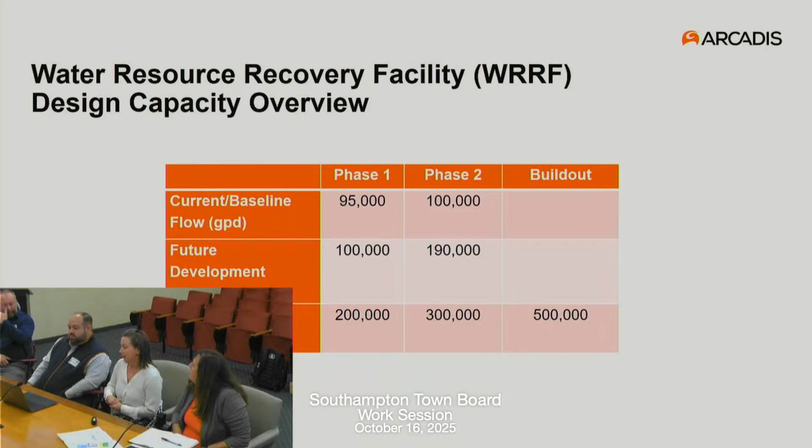And we added on top of that for phase one an allocation for the future development that is being worked through with Historical Concepts that Janice mentioned. So we have about double the current usage as an allocation for future development, bringing the phase one capacity to 200,000 gallons per day. And then in phase two, similarly, the identification of current usage based on water use, an addition for future allocation for development, and then a total. So this is just to give you some context on what we're looking at for the capacity of the facility.

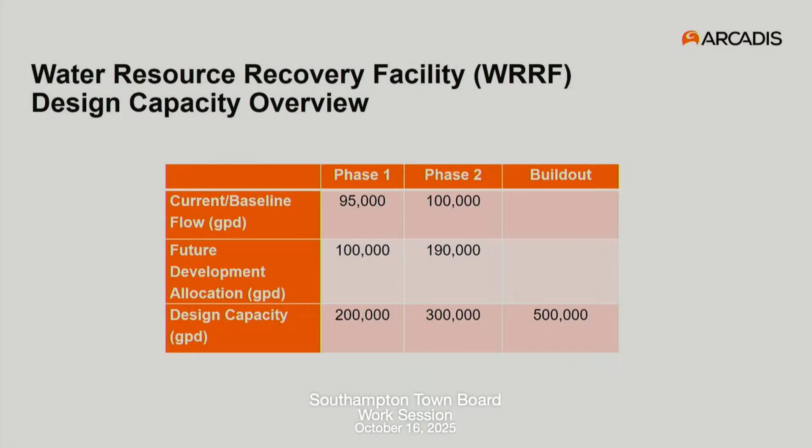And then in terms of site layout, what we're looking at here on the right-hand side is the loop of Enterprise Zone Drive that swings around. Our facility is the light gray rectangular box that has a darker gray access road around it. So that's the WRRF facility. What's highlighted in color here are the leaching galleys. All of the treated effluent from the new facility will be discharged back into the ground through leaching galleys. The blue area at the north side is a reserved area in accordance with standards.

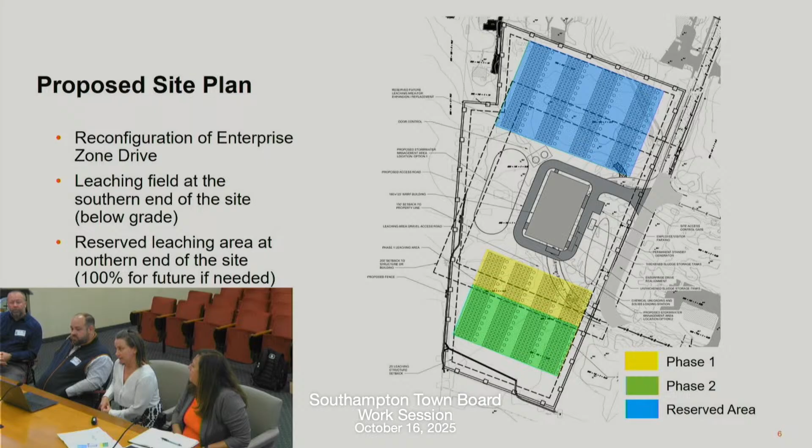We have to have 100% reserved area if it's ever needed in the future. Is that a county requirement? It is, yep. And then the yellow is the leaching area that's associated with the phase 1 flow, that 200,000 gallons per day that we just went through. The green is phase 2, so that 300,000 when we get to that point. And again, all of this is below grade.

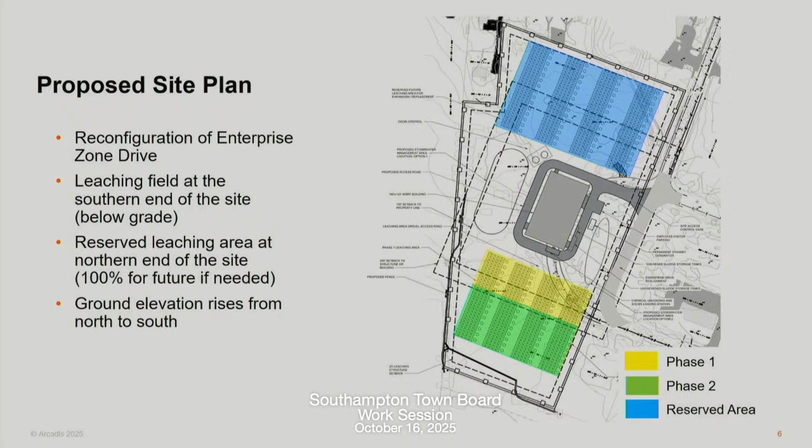The next slide goes into a little bit more detail on that effluent discharge. So it shows a schematic of what a leaching galley looks like. There is another county requirement for the minimum distance of the bottom of the galley to the highest recorded groundwater. We did some modeling because the flow that we're discharging back into the ground does elevate the groundwater table slightly in that area. So we will be bringing in some fill to raise grade to maintain that required clearance between the bottom of the galley and the highest groundwater. But that's just some elevations to give some context about that discharge.

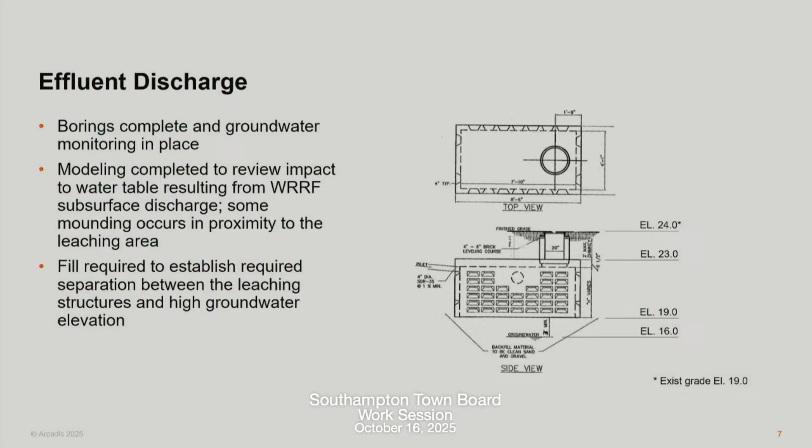Will it require any kind of fencing then if you're raising the grade? We'll have to look at that. We may need some retaining walls or something just to make sure that we don't have anything steep in terms of drop off, but that'll all be advanced through detailed design. And there's gonna be a site fence around the entire property, for security reasons. That's a good point.

So another thing that I should have highlighted on that first slide, we have areas identified on the site for stormwater management. And our goal here is really to make them another educational component of this project. Our site's very close to the Phillips Avenue Elementary School, so we're very cognizant of that. We'll talk more about that in the outreach that we've done. But we really want to use this facility as a tool to inspire future generations about the importance of water quality, especially in this area. So the stormwater management is another mechanism that we feel we can do that through.

So a lot of people think of bioretention as just a big divot that's grass and kind of an eyesore. We're planning on being very intentional with landscape design and specific native plants and really making it something that's beautiful and not something that's just a big hole on the site for stormwater management. That's good.

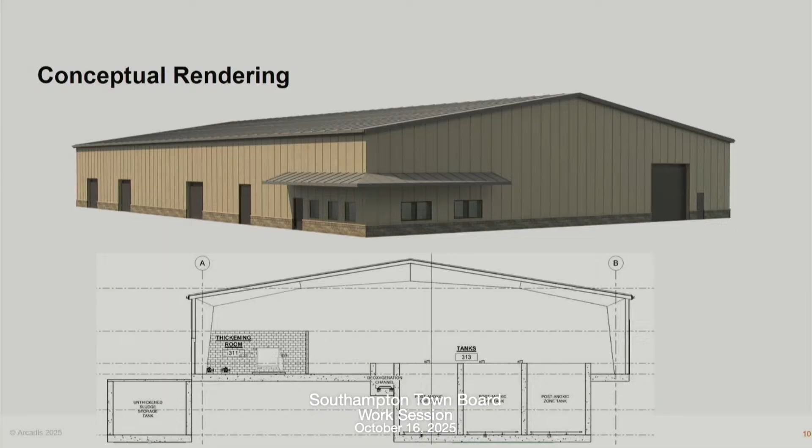Yes. Okay. It's a little plain, but yeah, we want the little architectural details, like the first one. And when he showed it to me, I said, the color. So all of this is flexible. Yeah. I don't know if you want it to be brown. No. There'll be plenty of brown, but it doesn't need to be outside the building.

But everything that is open on the tanks are gonna all be contained inside the building. That's right. Anything that's outside is covered. We have some sludge storage and holding tanks that are outside of the footprint of the building. You can see that on the bottom left of that cutaway. That's below grade with the cover on top, so nothing that's going to be exposed or seen from the road for smells. Okay, thank you. And everything is odor controlled as well, which we'll get into.

And that's going to all be on grade that we have now? You don't have to raise it at all? It's going to be as is? We're gonna need to figure out the entire site grading, because as I mentioned, we do need to bring in some fill for the leaching galleys. Right, but the building itself? The building itself most likely will stay on grade; it's not going to be elevated. No, it'll be on grade.

So next is the process itself, and this shows a process flow diagram. On the left, you'll see that represents the individual homes, the E-One pump stations, and the low-pressure sewer that brings it to the WRRF. You'll have 2 influent screens that are going to screen any rags or other items that need to be removed from the wastewater before it's treated, followed by grit removal to get any sediment or oil material that needs to be removed.

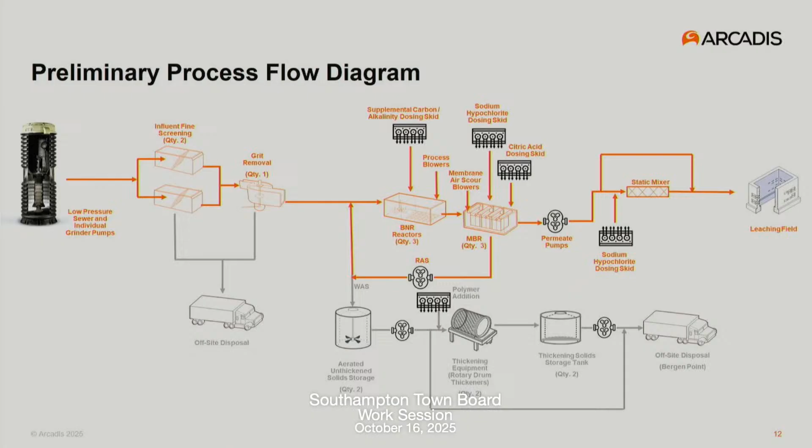From there, we're making provisions to allow for chlorination in the case there's a plant upset or something. We may not need to do it all the time, but we want to make provisions for this, and that can help with odor control and biofouling that may occur in leaching. So we want to make these provisions. You may not need it, but better have them up front than having an issue later on. And then it will be sent to the leaching galleys.

Are there any polishing filters, like as a last stage, or you don't feel it's necessary with this kind of technology? With the membrane bioreactors, you do not need that polishing filter. If we went with the SBR that was originally proposed in the previous engineering report by Nelson and Pope, then a polishing filter would have been required.

So that's the liquid side of things. Solids would come off of the MBR system, and in phase 1, they're going to be sent to an aerated sludge holding tank and be trucked directly to Bergen Point. In phase 2, thickeners are going to be added to the project because at that point, the cost benefit analysis shows that once you get around 200,000 to 300,000 gallons per day, it is cheaper to truck thickened sludge than unthickened sludge. So it reduces the volume, basically. Yeah, so less trucks traveling to Bergen Point, and it was overall cheaper to do that.

I was so glad that the county was willing to work with us on that and accept the sludge at their facility. Yes. So with the thickened sludge, there will be a thickened sludge storage tank. That's where that will be pumped out in phase 2 to the trucks hauling it to Bergen Point.

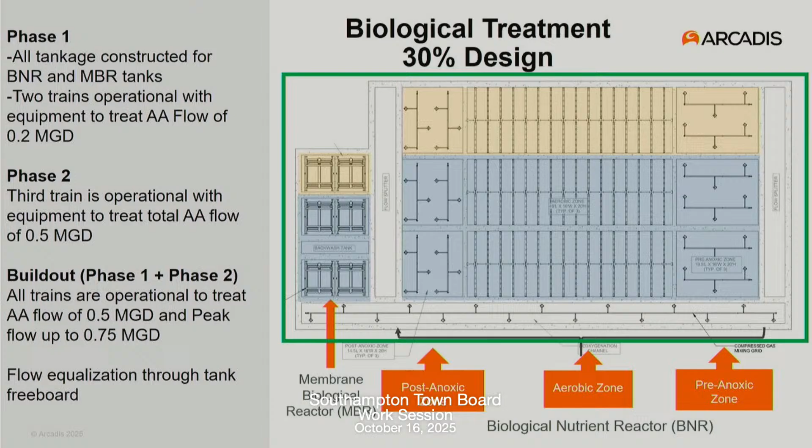So this is a summary of the major equipment that's going to be comprised in this WRRF. So in the process area, there's going to be three blowers, two duty and one standby for phase one, and then in phase two, an additional blower will be added. As I mentioned, the diffuser grids for aeration, one for each of the tanks. Two of them are going to be installed in phase one and one in phase two.

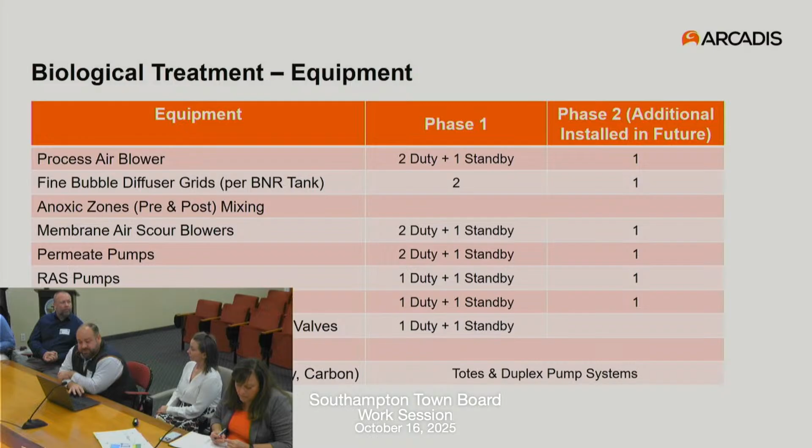Anoxic mixing and sludge mixing. We're using coarse air, big bubble air mixing. Membrane air scour blowers, permeate pumps, return activated sludge pumps, waste activated sludge pumps, air compressors to control valves as needed, piping, instrumentation, and chemicals. We're anticipating sodium hypochlorite, which is for cleaning and disinfection, citric acid for cleaning. Alkalinity may need to be added for treatment and removing of nitrogen and carbon as well.

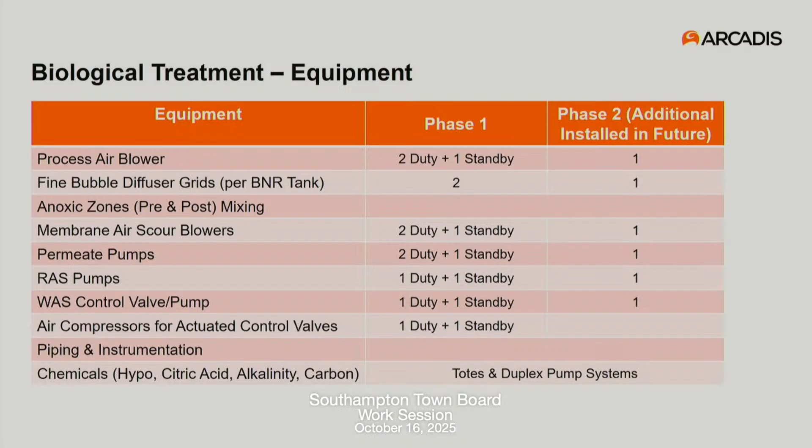I actually have a question about the building. Are you putting solar on the building to offset some of the electrical costs? We are looking at that. The building is not quite oriented in the correct direction, but we're going to look at the cost benefit of doing that.

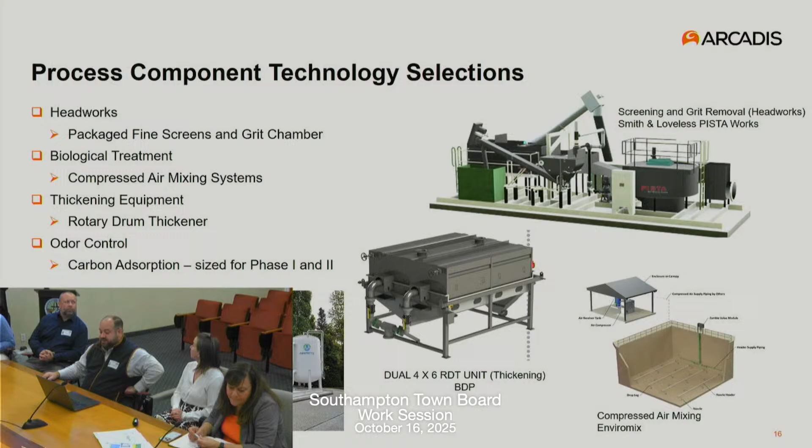For mixing, the lower right depicts what the compressed air mixing system looks like. It's the air compressors and air holding tank that is controlled by solenoid valves, and it pushes air in, and it creates this bubble that mixes the tanks. The middle picture is the rotary drum thickener for solids thickening.

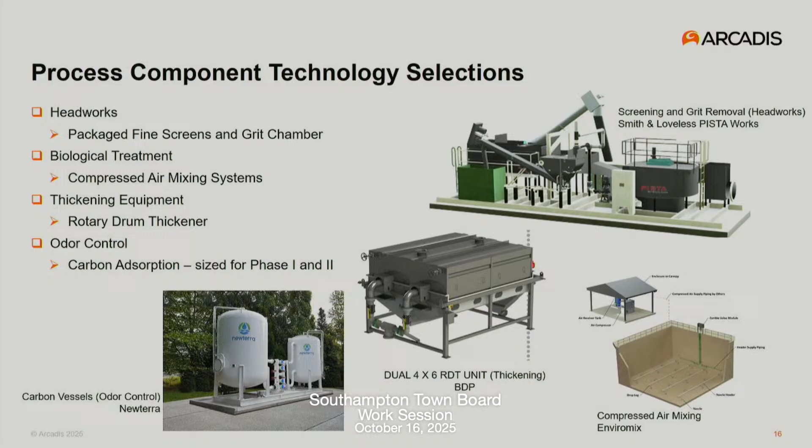And then the bottom left are the odor control vessels, that's really the only component that's going to be outside the building, behind the building, for removing pungent odors. You're talking about the carbon vessels will be outside the building? Yep.

It's interesting, we should note that the Phillips Avenue School, while not in the sewer district as part of phase one right now, we have made provisions to include them as part of phase one flow. So we'll have to work on, they may be an outside user for phase one. Out of district connection? They're going to contract in, which we have all those municipal agreements in place.

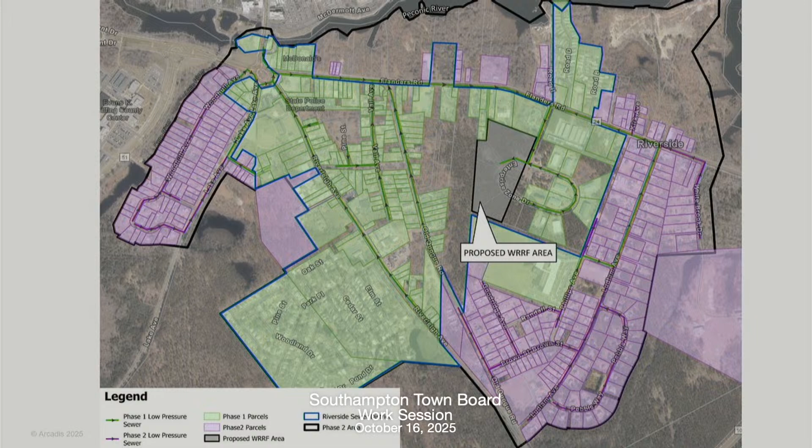The black line represents the future sewer district when full build-out is completed, and the purple parcels are those existing parcels that would be making up that sewer district in the future. Wait, the what? The non-colored right now are vacant parcels that could be developed in the future. What are you saying, that the black or the dark gray is proposed? So right in the middle, that's the proposed WRRF, the treatment plant property.

The black line on the very outside of the parcels that are shown, that is the future sewer district boundary. Most of those properties are all preserved anyway, so it doesn't really have any bearing on anything, all the top. You mean the green? No, he's talking about this black line, I think, the way at the top, the whole thing. Oh, so it encompasses areas that are preserved. It's the full hamlet of Riverside; the district boundary is going around. I see.

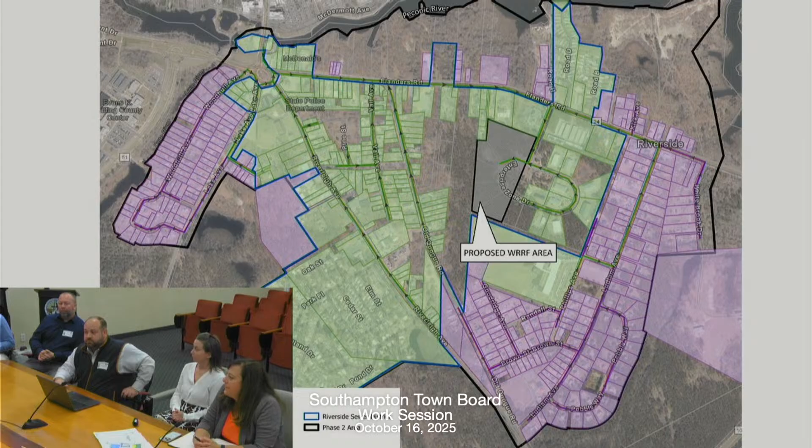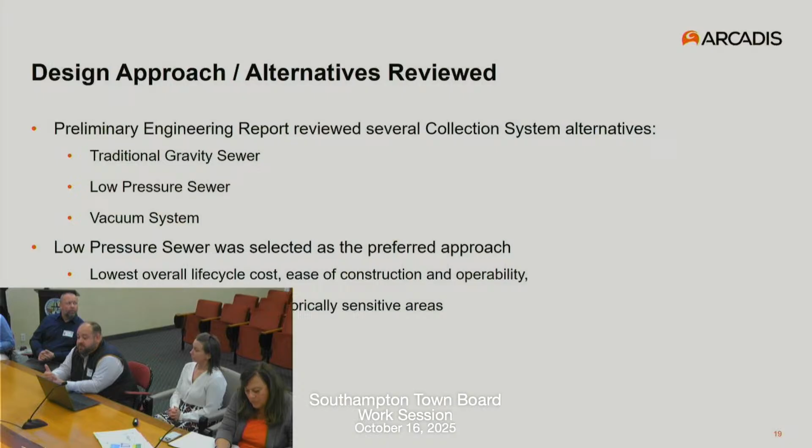So as to how we've gotten here, back in April, May, we had submitted a preliminary engineering report that looked at alternatives for the WRRF itself, the technology used for treating, as well as the sewer. And we looked at traditional gravity sewers with larger pump stations. We looked at low-pressure sewers, and we looked at vacuum sewers. Based on a cost-benefit analysis, we had recommended the low-pressure sewer with individual grinder pumps at each property. That provided the lowest overall life cycle cost and provided an ease of construction that traditional gravity sewers cannot provide.

We have high groundwater in this area. So some of these sewers, traditional gravity sewers, would have to be constructed 10+ feet deep in groundwater. And over time, that would result in the groundwater getting into the sewer. So you're going to be treating groundwater and reducing the amount of flow that could be treated from parcels, instead of the low pressure sewer that's actually constructed closer to the ground surface, typically 5 feet and above. We're proposing about 4 feet deep. And it's just much easier to construct than gravity sewers. And its operability is very easy as well.

Another benefit is there's no large pump station. I think that previously there were 4 pump stations being proposed. Some of them were on historically sensitive areas, so that is no longer required. No pump station, just small grinder pumps, similar to what we see over here. And this was peer reviewed by our reviewing Hayduck, and you agree this is the best approach? Yeah. So low-pressure sewer systems, great for flat terrain, high groundwater table, undulating terrain. It just makes things much easier.

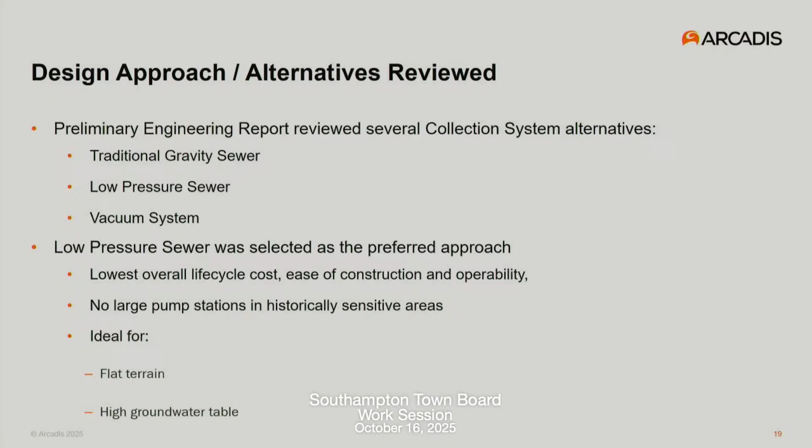And we have site specifics who are a rep for E1 in this area here, and they're going to give a little bit of overview on E1 and their experience here in Suffolk County. Okay. So yeah, any questions at any point, feel free to jump in. I'm gonna try to stay 30,000 foot view of this, but we can get pretty deep into the weeds if anyone wants to go that direction. So just a little quick history on the technology itself, just so everyone understands. This is fairly new to the Long Island market, but it's not new in general. They've been making these pumps and putting them in the ground since about 1970.

There had been companies working in this area previously and just not a lot of growth, but there were these needs, as you guys are looking at now, where sewering some of these areas with higher groundwater tables is very challenging, and putting a large diameter pipe into deep groundwater applications can get very pricey. So this technology kind of gives you the ability to sewer those homes without some of those environmental impacts and cost of deep excavation, shutting down major roadways, and things of that sort.

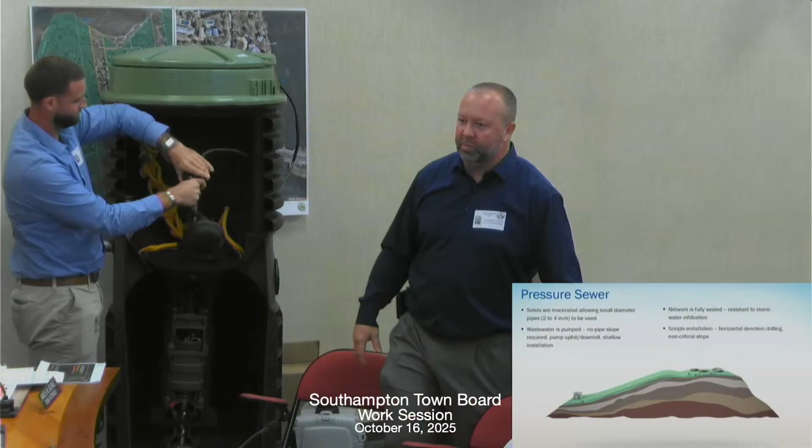So technically, you could take this unit, take the lid off of it, drop it into the ocean, and the pump would still operate. We can't dewater the bay, but it wouldn't affect the pump to try. Pumps want to run. They would just sit there and run. It just would not be able to really keep up with the flow. But the pump is fully submersible. There's no part of it.

And then the vent pipe is internal? Yeah, so the vent pipe is built in where it actually vents out under the green lid you see at the top. And years ago, E1's first iteration of this pump was the 200 series, and that existed from probably '85 to '94. They actually had a vent on the side of the tank.

Most people, they see a vent, they smell something. They don't see a vent, they don't smell anything. It's more in your mind than anything else. So raw sewage, you may realize you pass every day, you wouldn't even notice it. It's not that bad of an odor. Septic and grease, whole different world.

Zechariah also gets to work with his father on some wastewater treatment plant operations where he gets to really get deep into that stuff. But the venting out under the lid, because we're keeping such a low amount of sewage on hand, I have pictures and some slides for different presentations where we've had people set up picnic tables over the top of these lids, and that's where they eat their lunch. And no one knows what that green lid is, but it's typically not an odor issue, but we do need a nice fresh air vent.

So depending on the groundwater elevations, like in Patchogue, some of those areas down on the South Shore, there's houses down there that their front yards go underwater 4 times a year. So in those cases, we have what's called a lateral vent system, where it's actually a pipe that comes out sideways, comes up the side of the house to a little snorkel vent, maybe 4 feet up or whatever is the high point, because the pump does have to breathe. As water comes in and out, we have to be able to displace that air. So our traditional vent is what you see here, right up through under the lid.

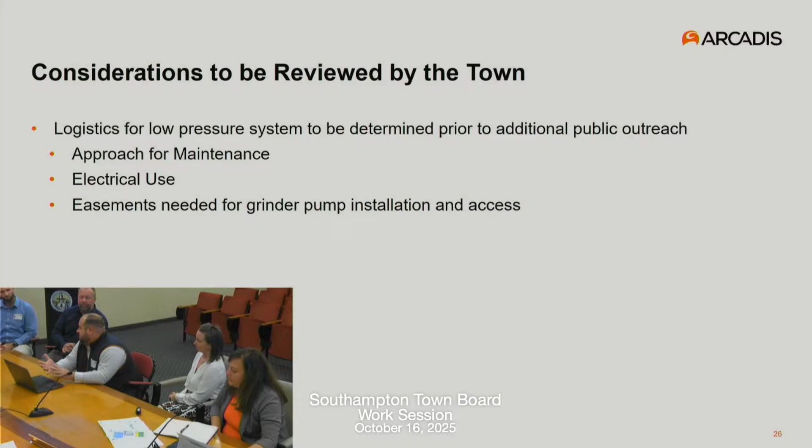So the one thing we really didn't talk about was approach for maintenance. So there's really 3 models. A company like Site Specific could be the owner's agent and take care of all of the maintenance requirements. Their number gets on the box, and they get the alarms and they go out and take care. It's a little bit more expensive, that option, but it takes all of that out of your worry.

There's a hybrid approach where you may have someone on staff that does some of the routine maintenance and interfaces with Site Specific over the long term, replacing pumps and stuff like that. Or third, you could have full ownership of maintenance requirements. So at some point, the town is going to have to decide what model the sewer district is going to function on. Not just for maintenance, but replacement costs going forward as well.

So just to touch on that real quick, I think this project is less than 1,000 total pumps. For now, but with development, it's going to be larger. Right. So we cover about 50 to 60,000 pumps in our territory. Typically for about 1,000 pumps, one person is all you would need. And that's from any aspect of that ownership at all. Unless you didn't want to do it at all, then you would need no one.